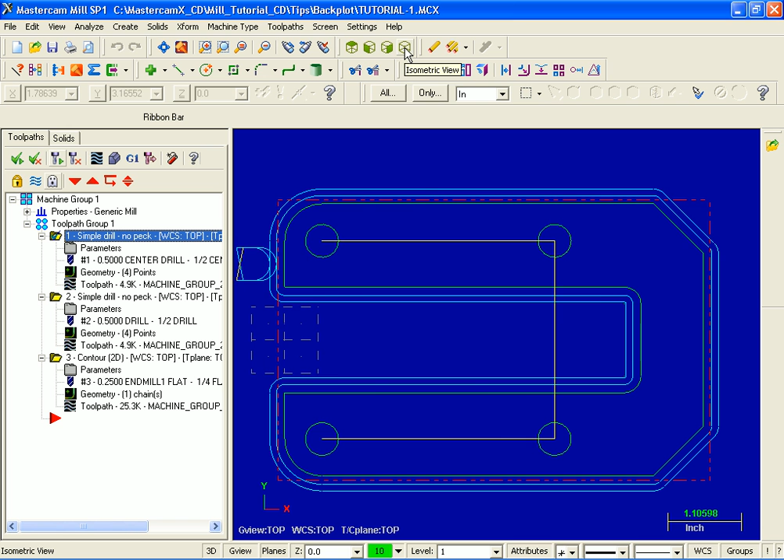Before we start, I'm going to move up and select isometric view from the top toolbar. Now let's move over to the left in the toolpath manager. Now I only have one operation selected. That's the first operation using a 1/2 inch center drill. Now if we went ahead and backplotted, all we would see is this first operation.

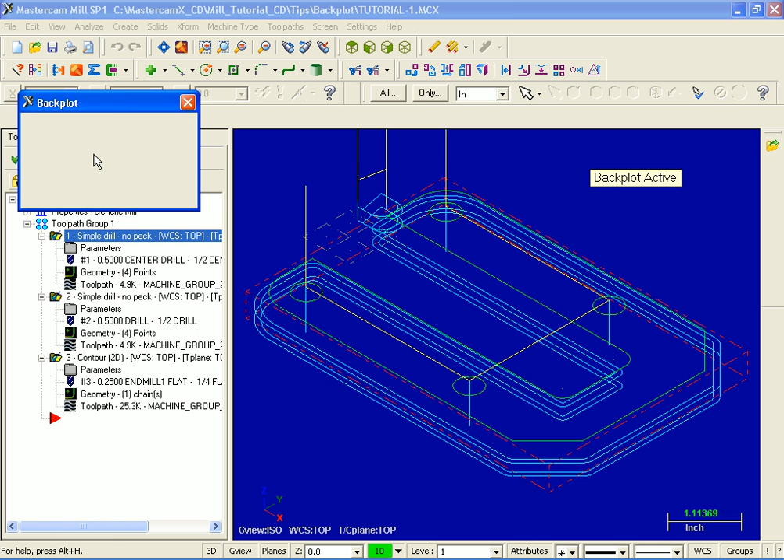So what I'm going to do is move on up and click the icon for select all operations. Next I'm going to move on over to the right and click on the icon for backplot selected operations. Now I can move this dialog box around. I'm just going to move it up the top here.

Now let's just check out what icons are turned on. For example, this first one, we've got the display tool turned on, and the only other one that's turned on is display rapid moves. I'm also going to turn on display holder. Now up in the top left hand corner is the double arrows to expand this dialog box.

Now this white space in the middle of this dialog box is the operation pane, and that contains the operations we're backplotting. We've got a center drill, a drilling operation, and then the third operation, contour. I'm going to move down to the bottom. We've got a details page, and at present it's got nothing in it. But later on we'll find out what kind of information is detailed here. I'm going to flip over to the info page.

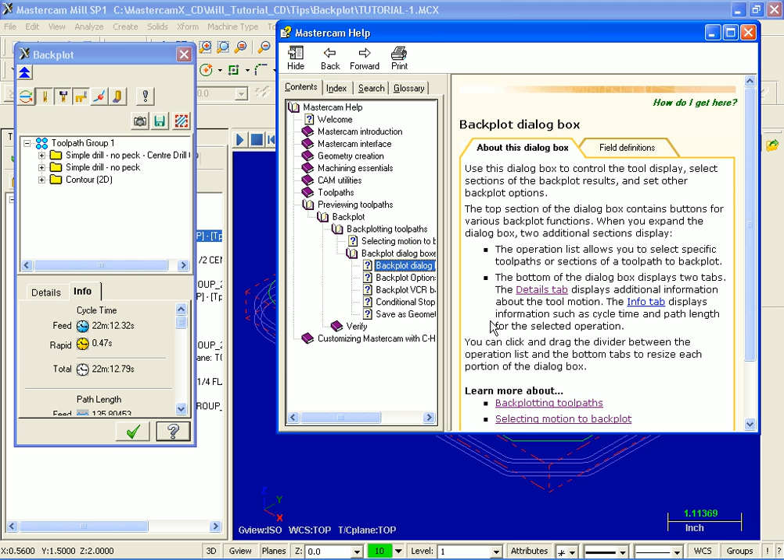Now at the very bottom of this dialog box is a question mark. I'm going to click on it, and here we are in help, and we're opened up at backplot dialog box information. What I'm going to do is click on field definitions, and this is where we can find more detailed information about the icons that we see over the left in the backplot dialog box. Let's slide on down. So information on the details page and the info tab.

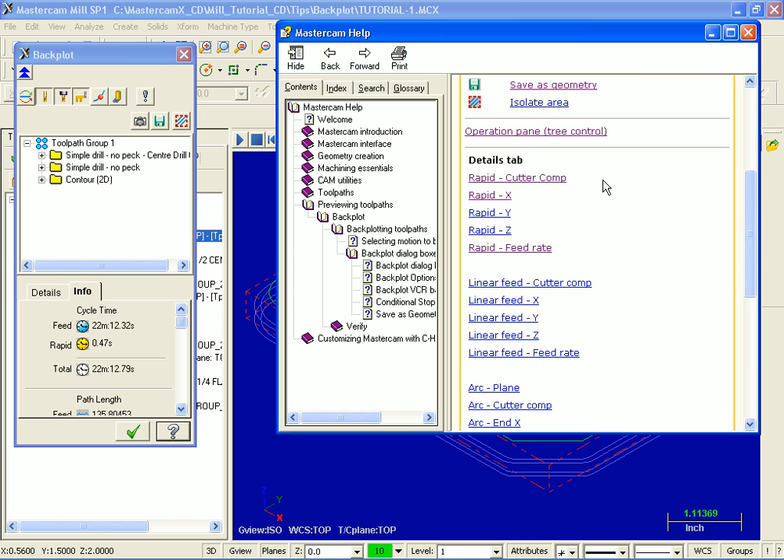For example, back over in info tab we've got the time cycle at feed is 22 minutes, the cycle time for rapid is 0.47, and the total cycle time is just over 22 minutes. Now if we just slide back up again, the details tab, when we saw it earlier on, it was blank, but later on when we start to step through the backplotting process, we'll see what kind of information appears on the details page. I'm going to minimize this now.

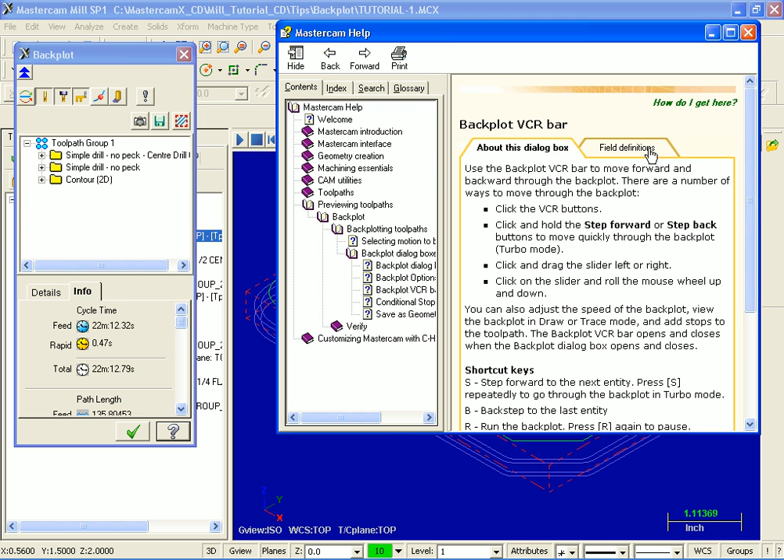Now let's move up now to this VCR type bar. Now on the right hand side is a question mark, so I'm going to click on it, and here we are back in help again, and we're at the page backplot VCR bar. I'm going to move over to field definitions, and what we have here is explanations of what these different icons do on this VCR bar. Now down below is the run speed slider, so we can move this to the left or right to increase or decrease the speed. And down below is the visible motion position slider.

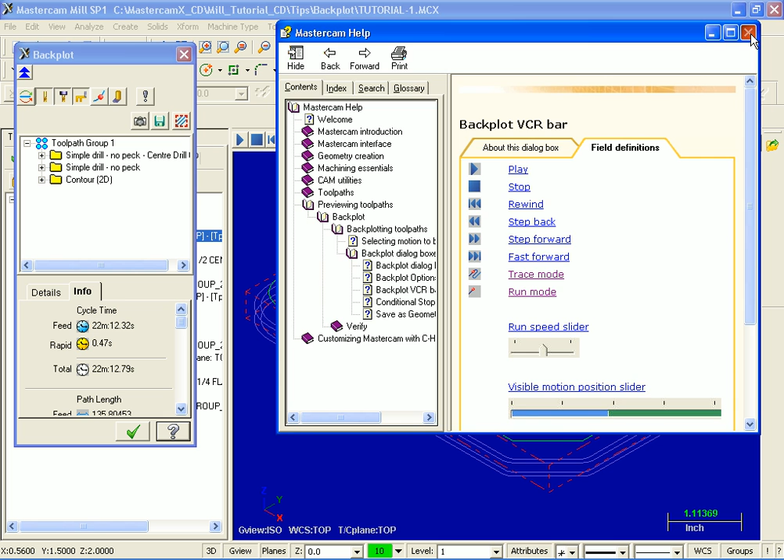Now let's close this up, and I'll explain what this motion position slider does. As you can see, we've got a blue section that represents our first operation, center drilling. The next section is the simple drill, no peck, and as you can see, this large portion over here is our contouring operation. Now I'm going to set the speed to midway and then move over, and I'm going to hit the play button,

and this is our center drill operation, and you can see the holder coming into view now. And the next operation, we're going to be backplotting the simple drill, no peck, and then the third operation is where we start to contour the outside profile. Now I can speed this up.

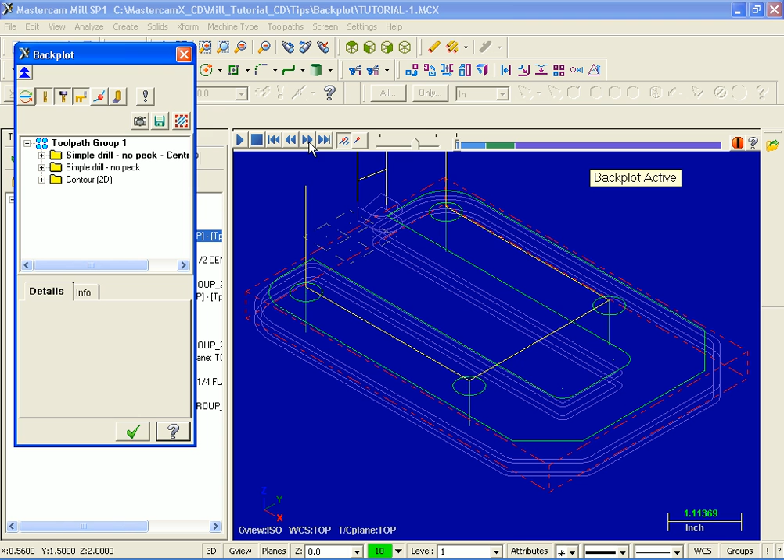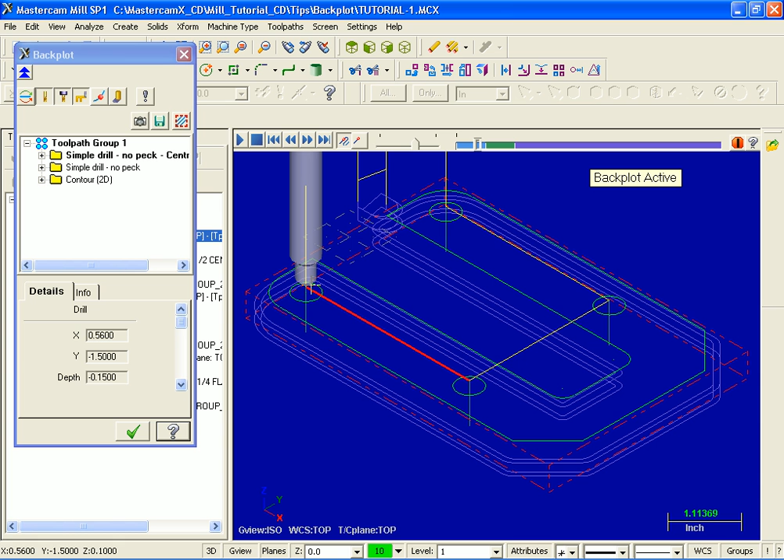And that's that complete. Now let's move on up here, and what I'm going to do is rewind. I'm going to move over to the dialog box and hit Details, and now I'm just going to step forward. So each time I click, I'm just stepping through the whole program. Now let's look back over to the left on the Details page, and what we can see here is the XY and the depth of where I am in the backplotting process right now.

I'm going to hit play. I'm just going to pick OK, and that completes our tour of backplot.